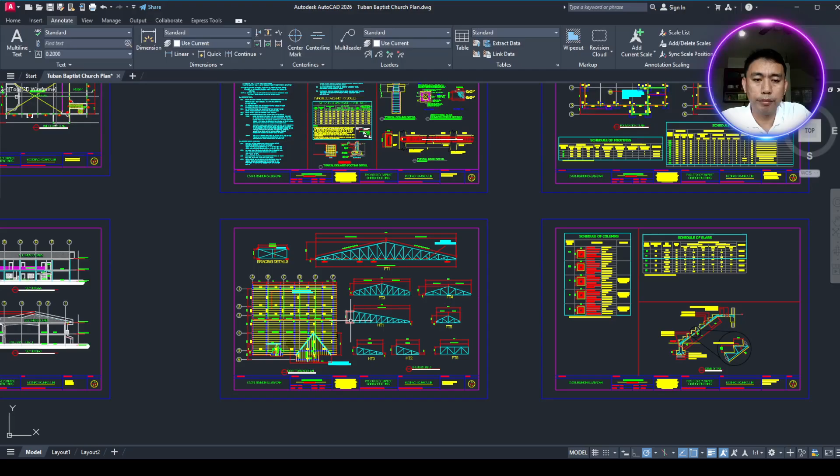So you start with the roof plan. So I have an example here. Once we have our roof plan, then we just copy the outline of the roof plan and create a framing plan out of it. Then alongside the framing plan, you have the details of your roof frame, which includes trusses and rafters. So before we go to the details, I want to give an introduction first about the components of roof framing.

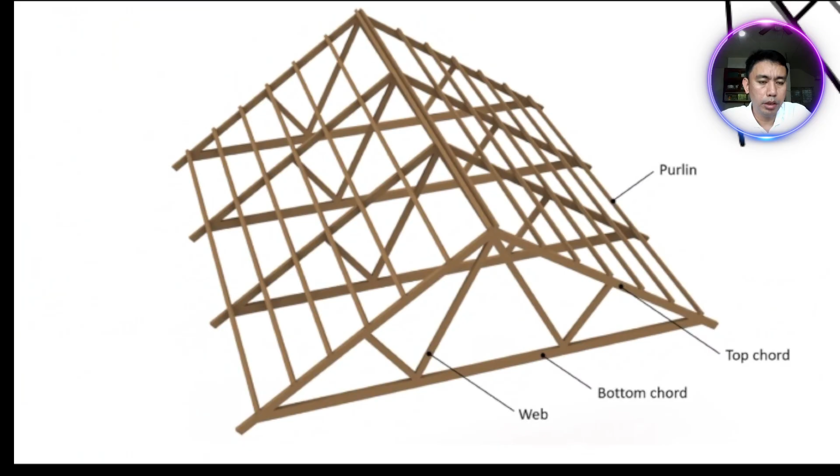So here in the illustration, you will see the components of a roof frame. Basically, we have the truss. So this is our truss. I hope this one is familiar to you already. So this one is a full truss. I will explain later why it's called full truss. So this is the basic structure that carries our roof.

So the roof loading, the wind load, and the live load from the roof is carried by the purlins, and then the purlins are carried by the truss, and the truss is carried by the roof beam. The roof beam is carried by the column, and then the column is carried by the foundation. So that is the load path for our structure.

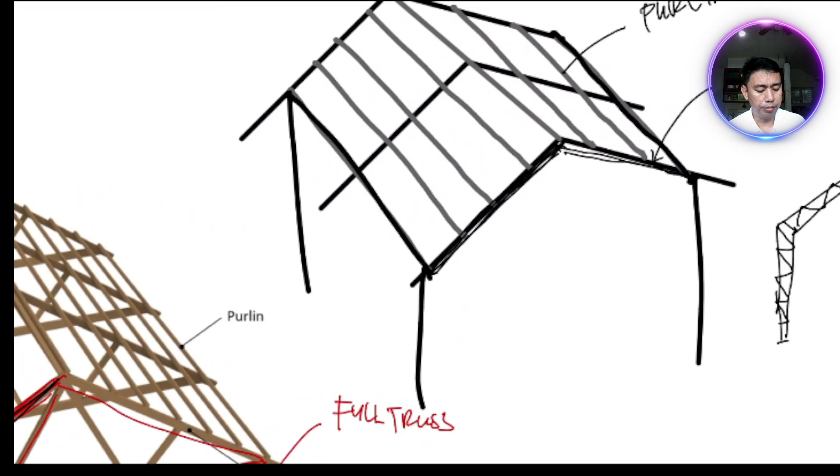So in your design, you have to use trusses or rafters. The advantage of using a rafter is you can use the remaining space here. While in trusses, you cannot use the space, kasi nga mayroon tayong bottom chord. Now, you use a rafter if you want this space here. So your ceiling will be along with the rafter kung maggawa tayo ng ceiling.

But for trusses, ang ceiling natin will be... sorry, again nag-refresh naman yung ano ko. I need to... on the screen. My apologies. Okay.

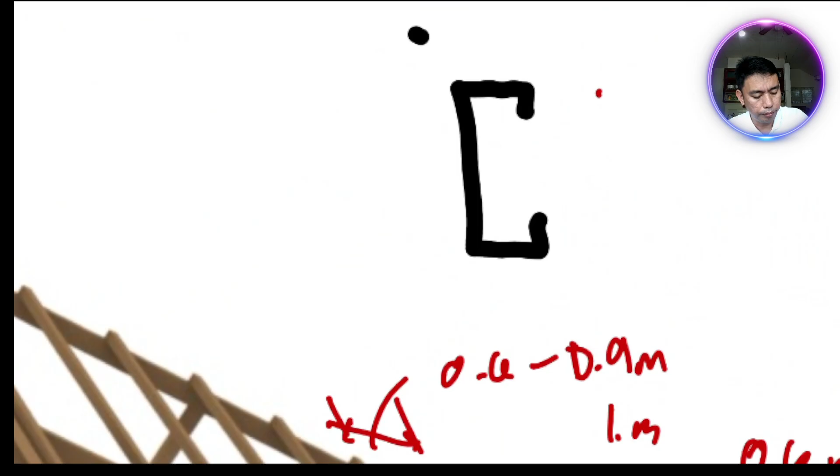Yan, naka-C siya. Actually, you can use 2 by 3 or 2 by 4? Sorry, 2 by 3 in terms of inches, 2 inches by 3 inches, C-purlins. For residential, you can use 2 by 3 or 2 by 4 C-purlins.

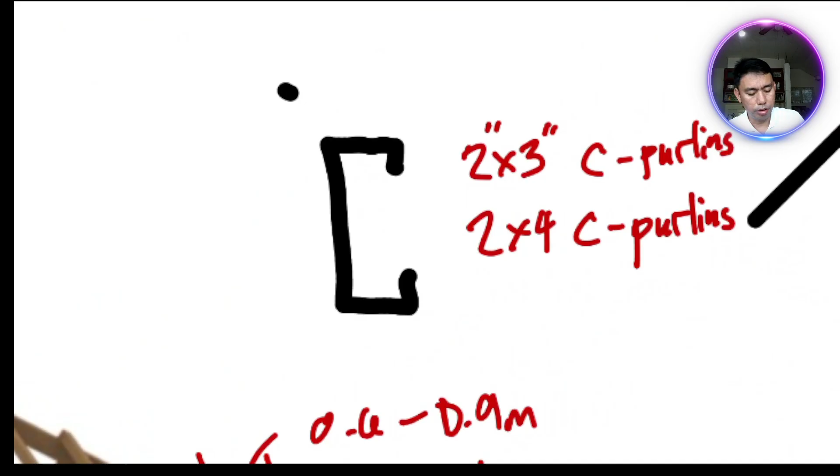Okay? So, ganyan yung itsura niya. So, it means this one is 2 inches by 4 inches. Yan. Yan yung itsura ng C-purlins. Okay? Then,

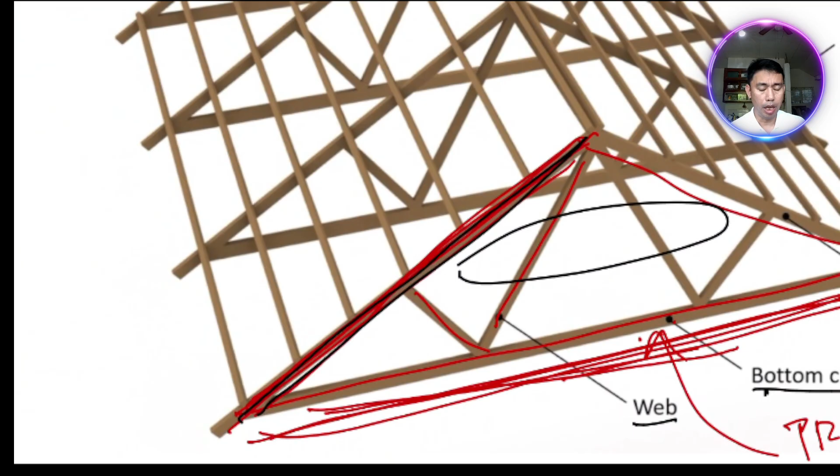for trusses and rafter, now ang trusses, you can use wood or steel. But commonly, we use steel ngayon. Kasi mahirap na hanapin yung wood at saka mas mahal na yung wood ngayon compared sa cost ng steel.

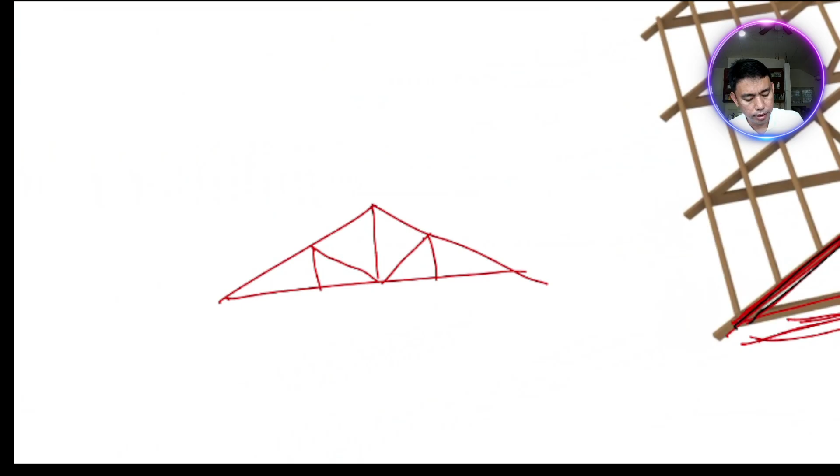So we use steel. Now, before we go to the detail of trusses, so yung truss natin, it could be a full truss. Meron tayong full truss or meron din tayong half truss. So kung full truss, let's say meron tayong trusses na ganyan, yan yung full truss. Now, kung half truss, of course, from the term itself, half lang.

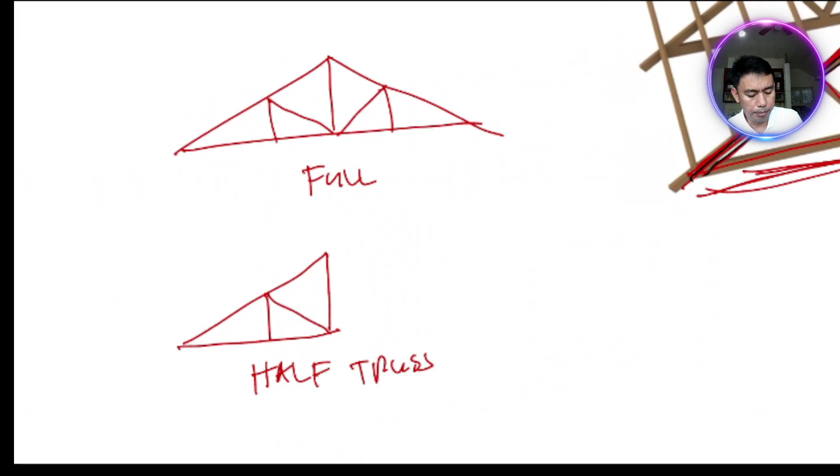Oh, again, yan. Okay, so this one is half truss. Okay, now, in terms of detail ng truss, kung gusto natin na naka-elevate yung roof natin from yung we call it bulada. I don't know sa English. Kung yung truss natin is nakaganyan, ito yung column, ito yung beam. Okay, this is the column, ito yung beam. Kung yung truss natin is nakaganyan, yan.

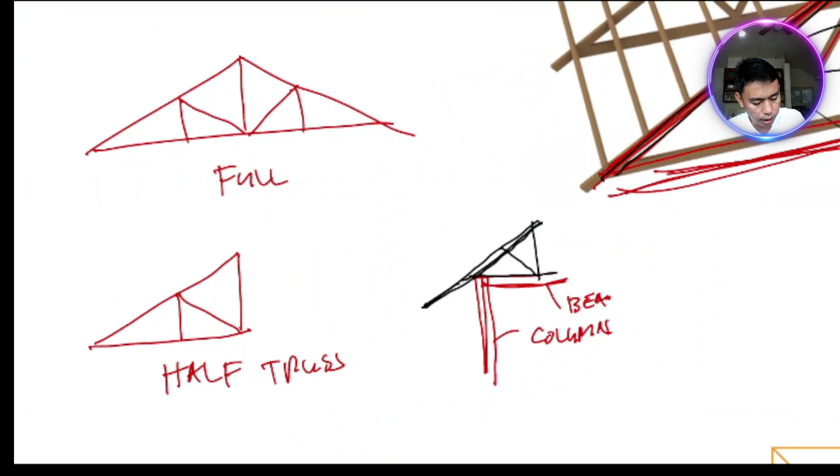So, kumbaga mag-extend lang tayo ng top chord. Ito yung roof natin. Naka-down yung roof natin. Okay? So, pwede rin na yung roof natin is ito yung column, ito yung beam. Pwede rin yung roof natin is naka-ganyan. Yan, imagine niyo. So, maybe hindi siya extension, naka-spandrel siya yung truss natin from the beam.

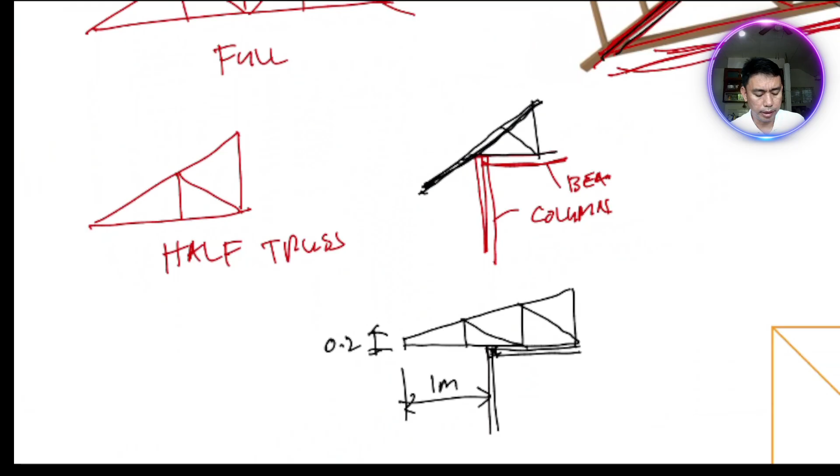And then, di ba naka-extend yung roof natin ng 1 meter. So, pwede tayo mag-extend ng 1 meter. Okay? So, dito, pwedeng mag-ano ka ng 0.2 meters. Kasi, in the detail, you have to show a typical detail. Let's say, ganyan yung truss natin. Okay? Yan yung truss natin. Imagine niyo. And then, dito yung C-purlins.

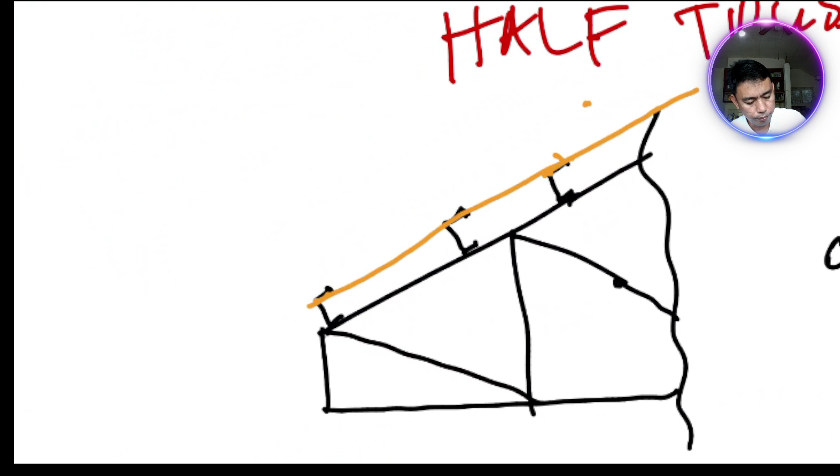Let's say, ganyan yung C-purlins. And then, lagyan natin ng roof. Kasi ganyan, nakapatong yung roof. Dapat nakapatong siya. Ulitin na lang natin. Ito yung roof. Okay. Ito yung roof. Ngayon, dito tayo maglalagay ng gutter. Remember, mayroon tayong gutter. So, yung gutter natin, dito siya. Depende sa design ng gutter natin.

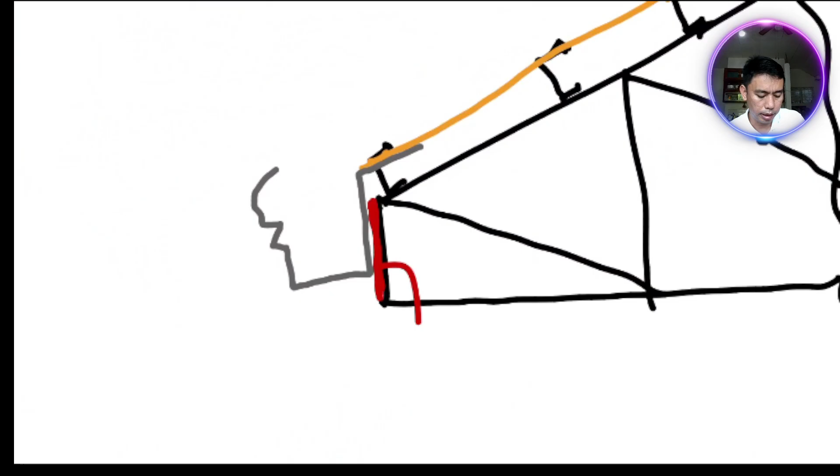Okay? Then, mayroon pa tayong separate na beam dito, or board. Ang tawag dyan is fascia board. Okay? It could be, yung sinasabi ko kanina na lamilla, or yung 1 by 6 na kahoy. But since we are using steel here, we can use board para madikit dyan yung gutter natin. Okay? Ito yung tawag na gutter. So, yan yung sumasalo ng ulan. Kung walang gutter, diretso na free fall yung ulan. But we have to design gutter.

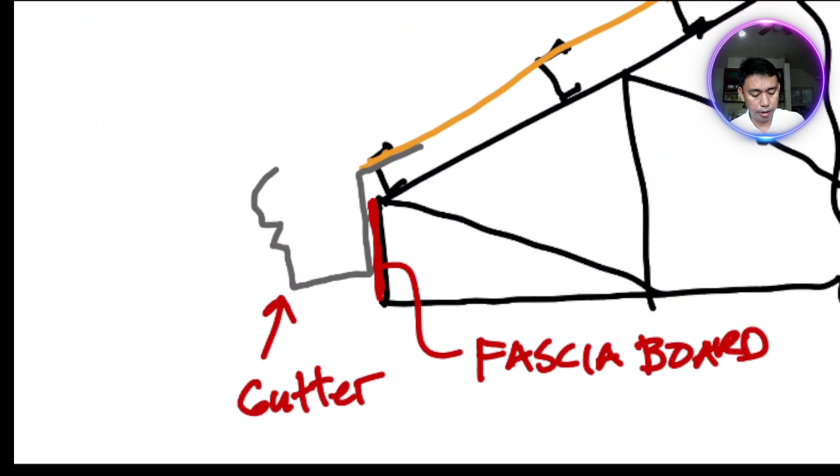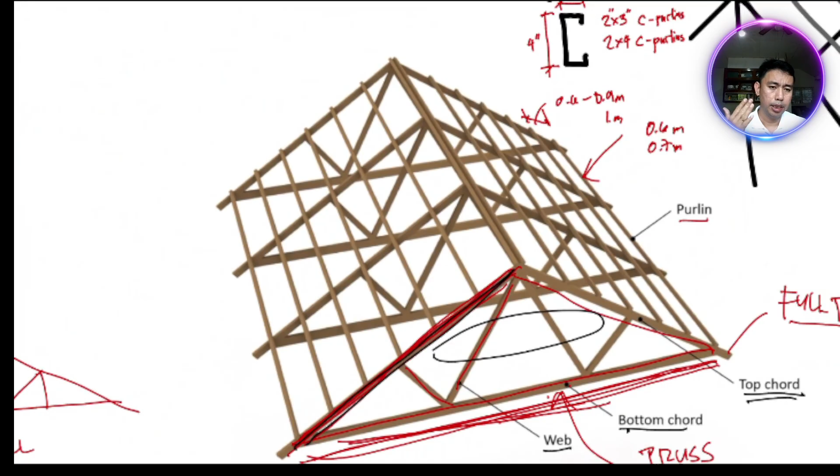So, ganyan. So, ang point ko dito is, sa edge ng truss, we can put it like, mayroong height na 0.2 to 0.3. Okay? Para didikit na yung gutter natin dyan. Okay? So, here, yan yung component ng trusses or ng roof framing. Meron tayong trusses at saka purlins. Okay. So let's go to the framing plan.

Ito yung pinakita ko kanina na framing plan like this one. So this is an example of roof. Ito yung roofing. And then I show the direction of the flow of water kung ulan. Ganyan. And then I'll copy paste that one. So what does it look like kung framing? So framing is parang skeleton lang siya. Okay? So ano yung itsura ng purlins at saka trusses? So imagine skeleton ng roof and then you're looking down from the top. So it will look like this one. Okay? So how do we start drawing?

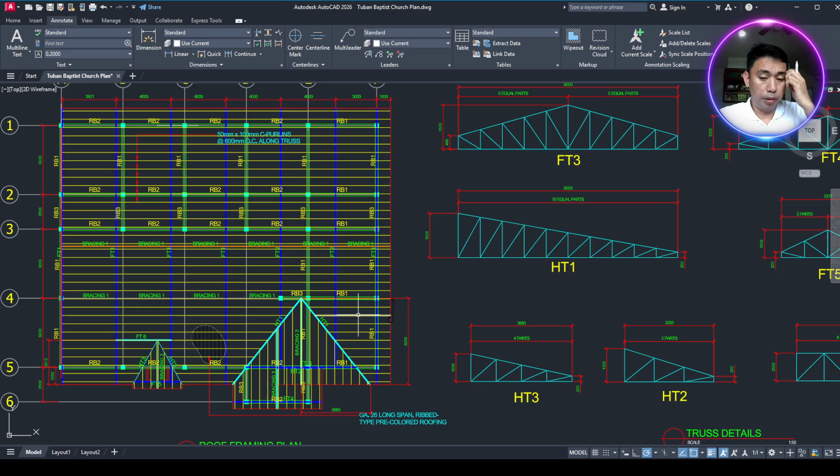I know that your roofs are complicated, unlike this one in this example, which is very simple. But what if it is complicated? So let's have this as an example, assuming I have a roof like this one. So a bit complicated, medyo complicated siya na roof.

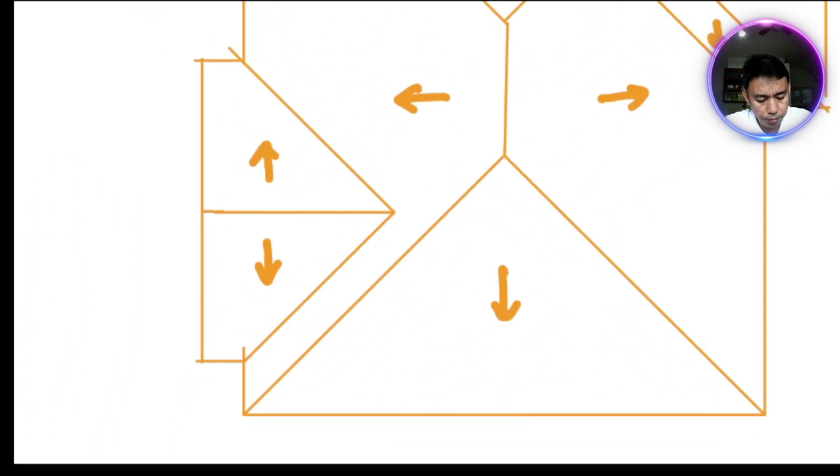So now just a comment, may mga nag-submit ng roof plan na, take note this line here, ito na line, yan, it should be parallel. Okay? Parallel yan, naka 45 degrees yan siya. Lahat ng lines dyan na naka-diagonal, it should be parallel, naka 45 degrees. Okay? So may nakita akong mga designs na roof plan, you have to correct that one. It should be parallel.

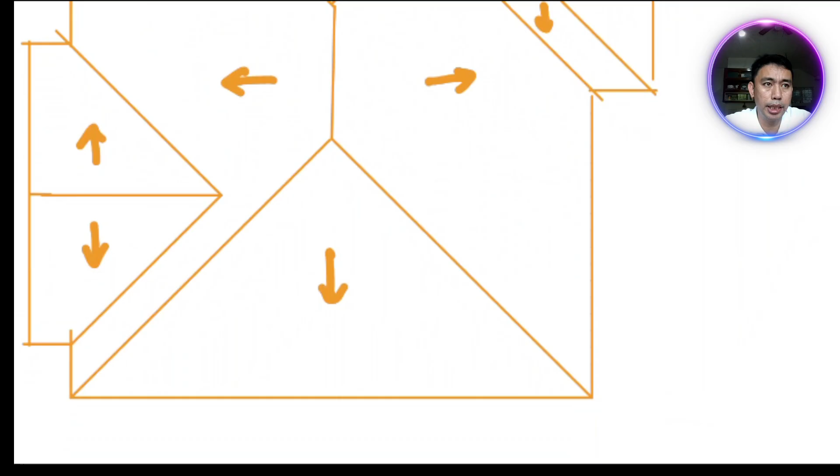Kasi mahirapan tayo later sa pag-draw ng purlins kung hindi yan parallel. And then, well, if you insist na it's not parallel, then it will be awkward sa tingnan yung bahay ninyo or yung roofing. Later sa perspective and the elevation view, it will look awkward kung hindi parallel. So you still have time to edit yung mga diagonal lines dyan. It should be parallel. Okay?

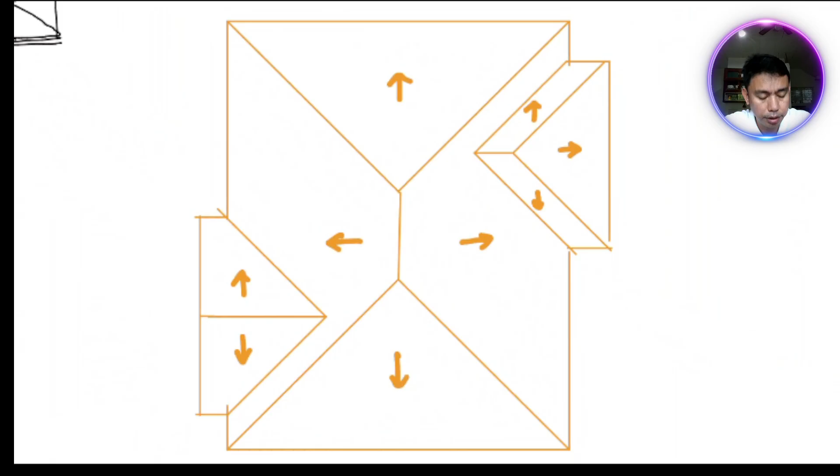So, di ba sabi ko 45 degrees pag may mga angle sa roof framing. Okay? So, how to start drawing a framing plan. So, assuming we have a framing plan like this, we will start, mag-draw muna ako ng purlins, okay? Maybe I should select another color for purlins, yung medyo light lang na color. I will try, yeah, I use orange here, maybe pink or peach. Okay, so how to start?

So mag-start ka in one corner, select one corner, and then dito sa pinaka-corner, actually, dapat mag-start ka dito sa edge. Meron ka sa edge, okay? But i-offset mo lang ng konti, and then start drawing your first purlins. So I will start here, mag-offset lang ako ng konti. If you can see here, yan, naka-offset siya. And then end ka dyan sa edge.

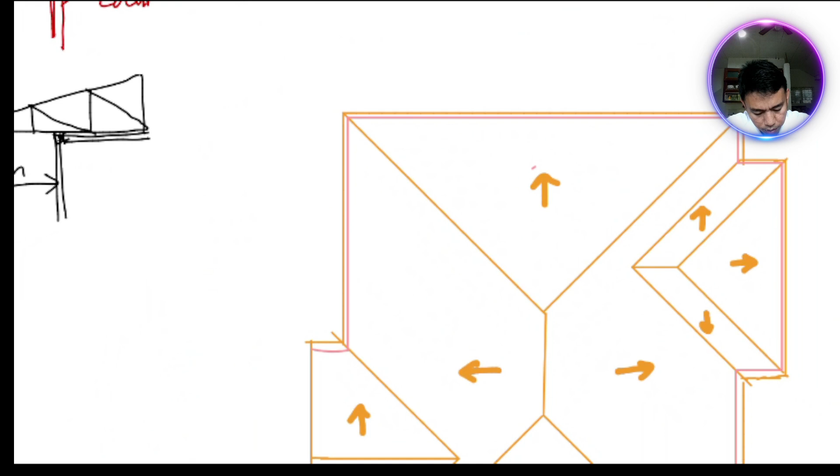Okay? Then, gawa naman ako ng separate na another four lines. Mag-measure ako ng estimated around 600 mm or 0.6 meters. Okay? Gawa naman ako ng panibagong lines. Ganyan, no? Tingnan nyo. Parallel siya ng four lines, estimated mga 0.6 meters. Okay? So, i-offset nyo na lang sa AutoCAD. Hindi ito exact itong drawing ko kasi tablet lang ako nag-drawing. But it should be 0.6 meters, yung parallel distance niya from other purlins.

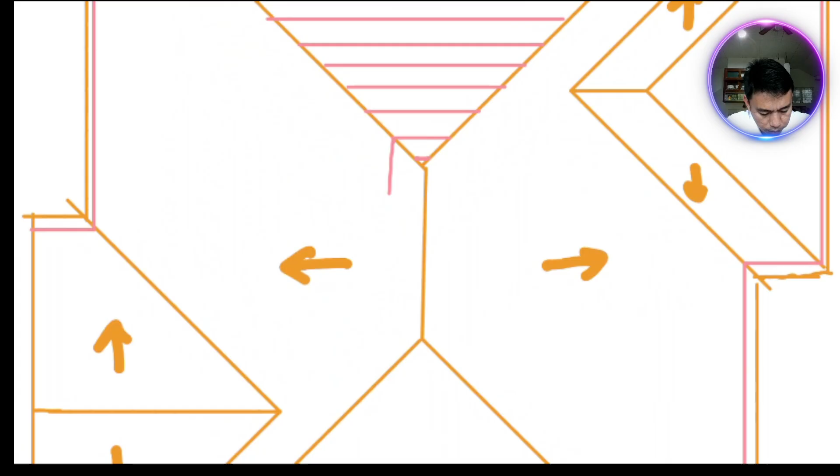Okay? I hope na-gets niyo yung concept. And then, dito sa edge, sa tip ng roof natin, dapat kahit less than 0.6 siya, dapat maglagay ka talaga ng pinakamalapit dyan na purlins. Kasi, dito sa taas, i-continue mo talaga yan. Dito, punta ko dito sa last. Tingnan nyo, mag-loop yan siya. Di ba? Every 45 degrees, mag-change direction tayo. Liliko tayo, left or right.

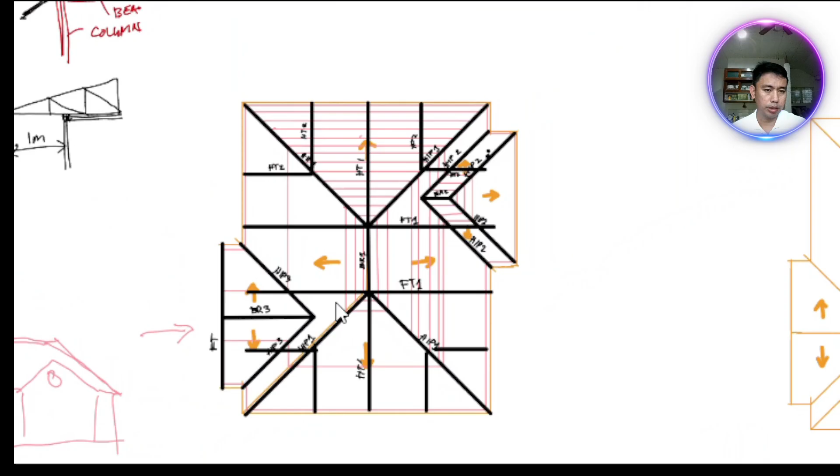Basta makita ninyo na ang unsupported length ng purlins is greater than 5 meters, then you need to put intermediate trusses or we call it half truss or full truss kung possible. Okay? So, dito na naman, let's say, malayo talaga ito na distance, then we need to put half truss dyan. Okay?

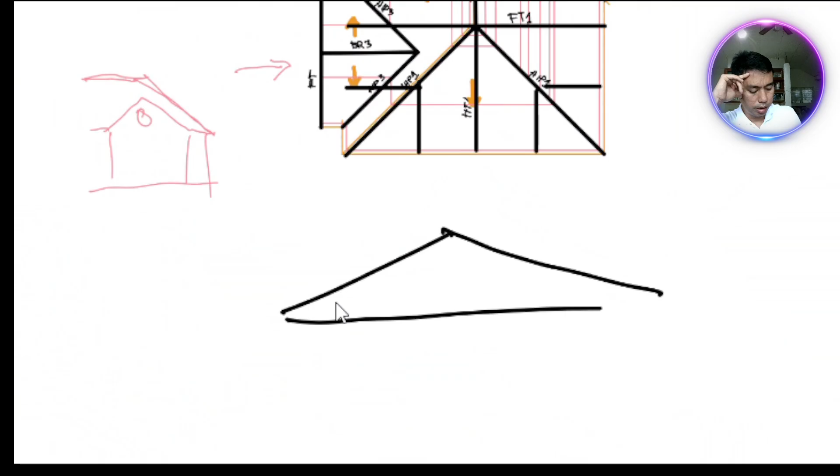Yan yung structure natin. And then, you need to detail yung mga trusses. So, let's say yung full truss natin, meron kang full truss na ganyan, you have to detail. Yan. And then, meron kang half truss. Yung mga lines lang. Okay? And then, you have to put material.